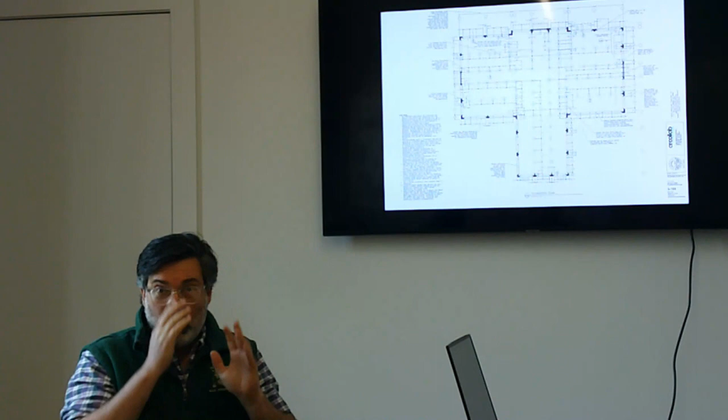And since that time, we've done something completely different from what we said in that meeting. That's because in thinking about the scope of what we were proposing, after talking to the National Trust folks and some folks at the state level in historic preservation, we decided that in order not to jeopardize future eligibility of the building for National Trust grants or National Park Service grants, we needed to take a slightly different approach that was more conducive to not discouraging that kind of grant funding.

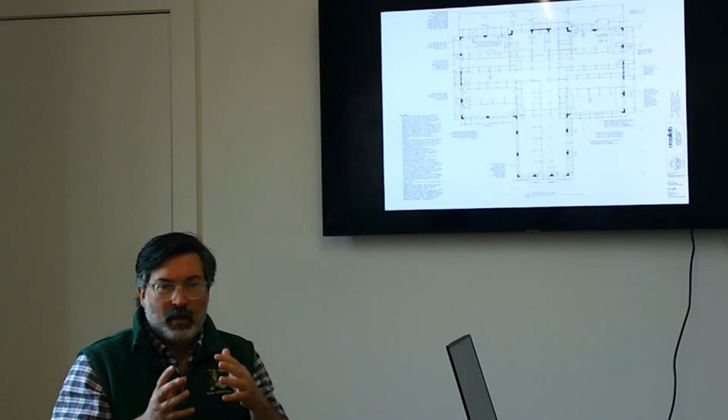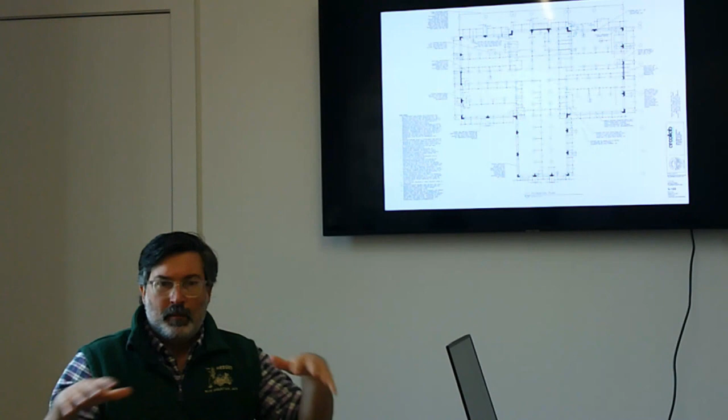So what it meant was that we derived a structural system which inserts steel structural frames inside of the building, along with a lot of fundamental foundation reinforcement and supplementation, and then additional work in the attic as well. We wanted to meet today to talk about what that scope is, to make you all familiar with it, so that when the time comes to apply for future grants and to get pricing for this work, we'll all be on the same page with what's being proposed.

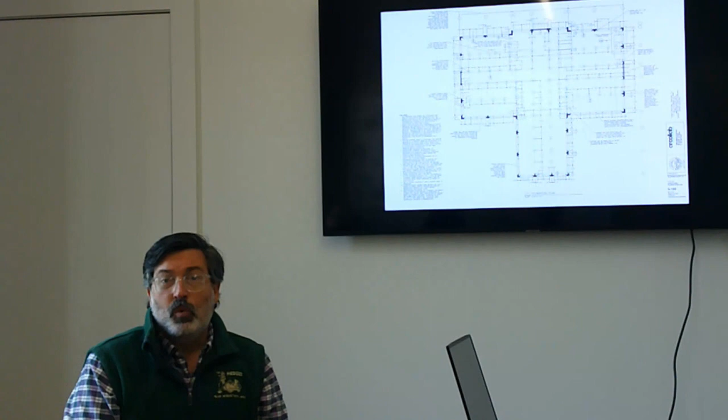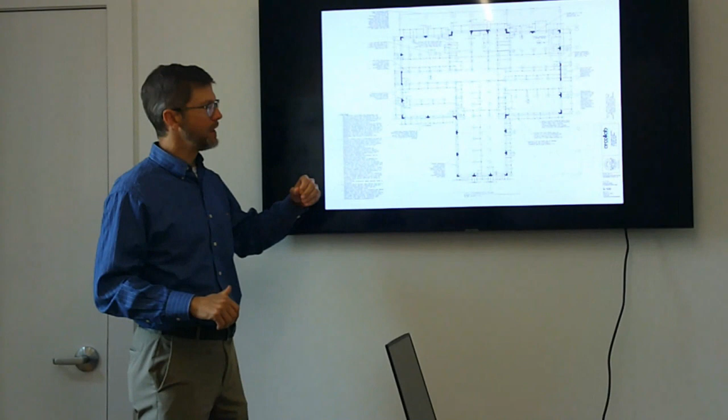So I'll turn it over to Reed to describe what we're proposing and what's in those drawings. I'll just pop up to the screen, that may be the easiest way to do it. It may take about 15 minutes or so to run through the primary work we'll be doing. This is the foundation plan, so we'll start at the bottom and work our way up.

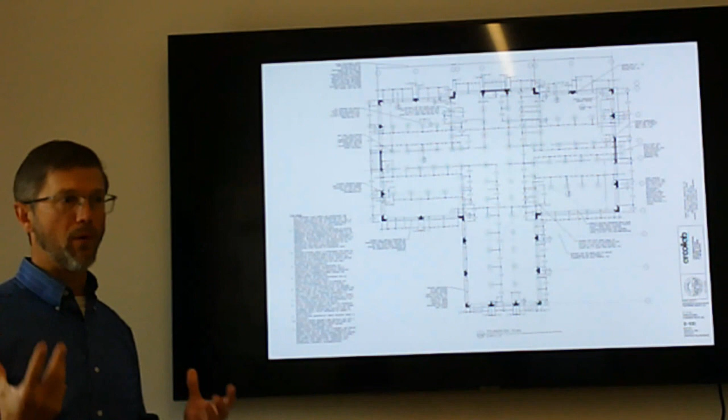The existing brick piers are in poor condition. What we're doing to remedy that: at the perimeter of the building, we've got to leave those brick piers in place for historic purposes, so they'll be repaired, but we'll be supplementing them with new concrete footings and a series of relatively small steel posts.

They're knee posts essentially, below the framing down to the new footing. Each of these, it kind of looks like a black dot at this scale, but each is a new steel post. So at the perimeter, they'll help supplement the brick piers.

On the interior, we're fully replacing those brick piers with new steel posts and footings. The other purpose of these posts is to reduce the span of some of the floor framing, to improve its performance, and also to give us 100 pound per square foot live load capacity, which we'll need for the potential assembly uses in this part of the building.

Let me add to that - you may remember last time, when the building was built as a school, it was built in a customary way. Now, with the potential change of the building to be both a museum space and an assembly space where you have gatherings, the building code requires those floors be able to support additional loading, more than it was built to handle. And so there are different parts of the building doing different things, so the loading requirements are different in different parts of the building.

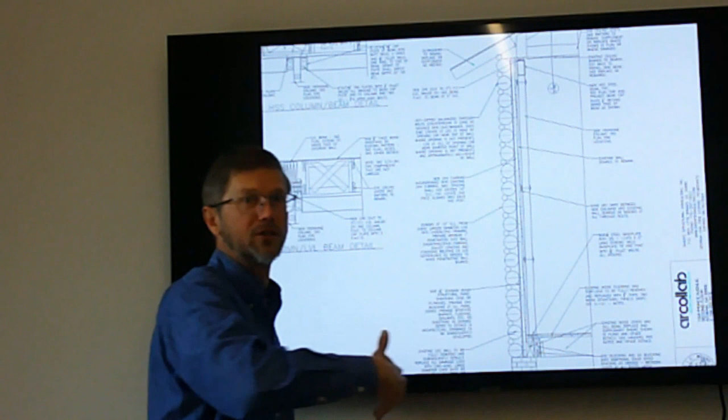When you look where there's a big log and then there's a little sapling that was used to chink the gap, those are missing in a lot of places. If you look through, you can see right into the back of the wood plank finish on the inside of the walls. The big problem in the whole scheme of how you repair and reconstruct these log walls is why recreate the same faulty condition that was there before, where water could literally penetrate directly to the interior and cause all sorts of problems.

So this is the big improvement to this system: when the logs come down, it gives us a rare opportunity to actually access the back of that original interior wall finish. By sheathing that and putting a waterproofing layer on it, you effectively create a watertight envelope. The logs then go back in, new and existing, toothed together, and it doesn't matter whether that outside layer leaks like a sieve anymore or not. It just doesn't matter, because the waterproof barrier behind it will shed the water down and out of the wall.

It also makes a much tighter envelope so that in future use, if you air condition the space or have mechanical systems, you're not conditioning the outside air as well. Right now you have what's equivalent to a wood tent with so many holes in it. This will create a much tighter envelope that will allow you to actually get some legitimate cooling and heating in that space for future use.

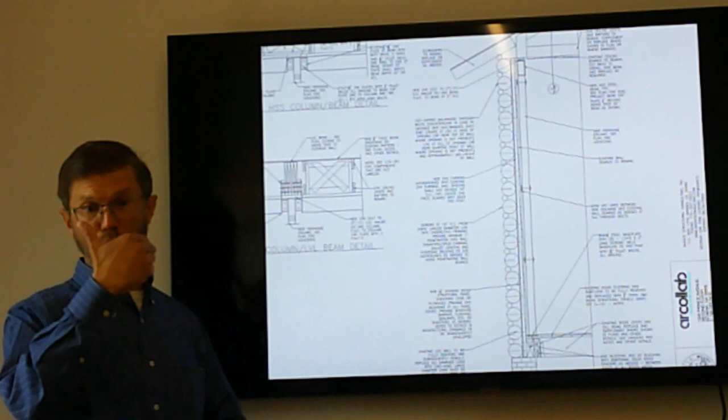But the other advantage of this system long term is that right now these logs are the load-bearing perimeter wall. We're adding a steel frame that Joe alluded to earlier, based on our conversations with historic preservation folks at the state, that will now serve as the load-bearing plane for roof loads. This will also serve to resist wind loads on the walls. Right now, there's not a lot of wind load resistance.

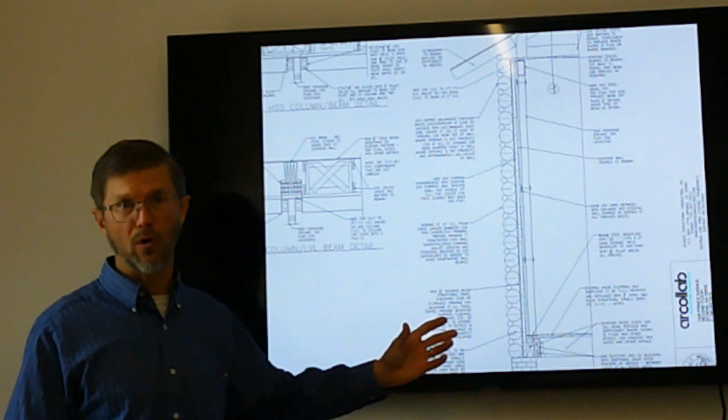We're mitigating that with these steel frames as well. The advantage long-term is, if you have deterioration of an individual log, right now in your system you could not take that log out without essentially rebuilding the entirety of the section of wall it's in. With this new system being more of a veneer, you'd be able to pull out an individual log and replace it if in 30 years you have deterioration, or if some of these reused logs are borderline and continue to deteriorate and need to be replaced in 15 years, for example. So long-term this will be a very good system, just a matter of getting there.

We're hoping that some of the logs, if you look at the outside face that's been exposed to the weather, there's deep checking in them, even cracks that have opened up from shrinkage of the wood fibers. We're hoping the backside of those same logs is in relatively good shape because it hasn't had the solar exposure and has been relatively protected from moisture. So we're hoping to get up to as much as 50% of the logs being reused—we can basically take them out of the wall, flip them over, and put them back.

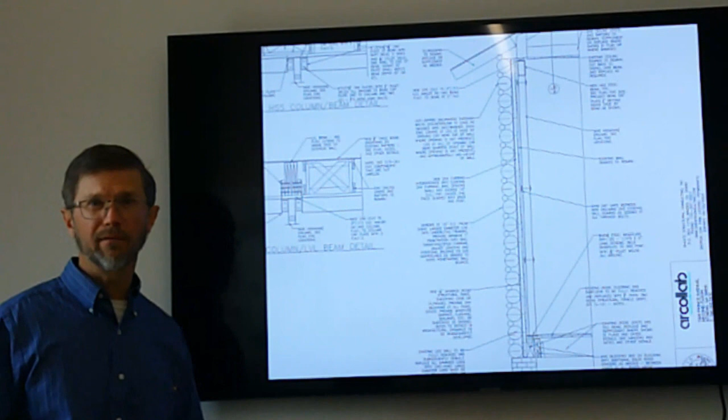Because they're not the structural unit anymore, not the thing that has to hold the roof up, the integrity of those logs is less critical. It basically has to hold up itself and the logs above it, and that's it—it doesn't have to hold the roof anymore. And we're anchoring it back with some screws for wind purposes, which will help temporarily with some of that process, or some of that self-weight support too.

I guess we can go back to—I was just going to finish running through this list. So that was where I got sidetracked: fully remove exterior walls in the area of the work.

Fully remove the subfloor and flooring for crawl space access in the area of the work, to be able to get to the members there to rehabilitate them. Remove all interior piers and all damaged first floor to be replaced with new members in the area of the work. Install new footings, new steel piers, install new first floor framing members.

Then we put the subfloor back, or put new subfloor in—in many cases that would just be 3/4 inch tongue and groove plywood or OSB, much like you'd have on a new house today. Install new steel framing and roof ceiling support beams, and then the last step, which we'll get into on the next slide, is the supplementation of the rafters and ceiling joists.

So that brings us to this plan, which is the ceiling framing plan. From the attic, there has been substantial movement, warping, rotation, gaps where we shouldn't see gaps in many of the ceiling joist laps, and also in the rafters themselves. There's a large gap at the ridge that has leaked and led to a lot of that deterioration in the center corridor now.

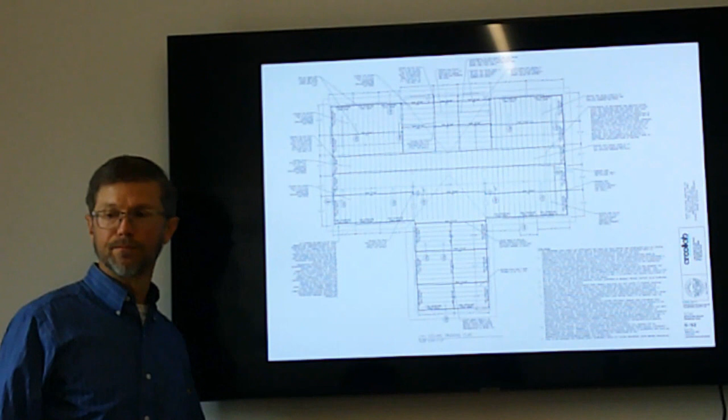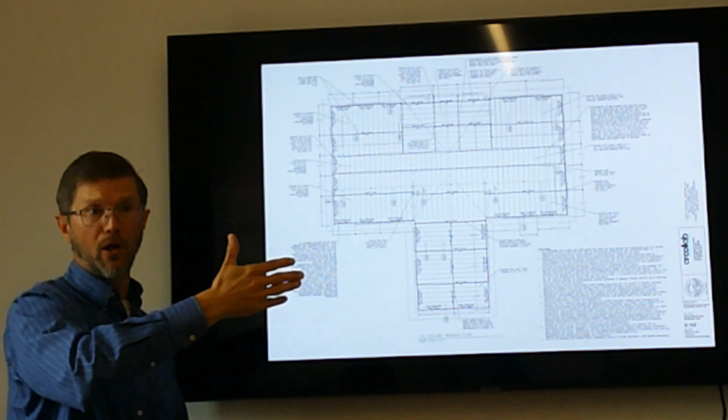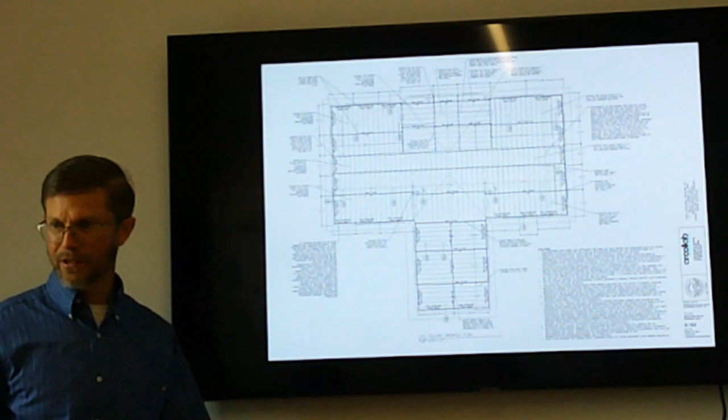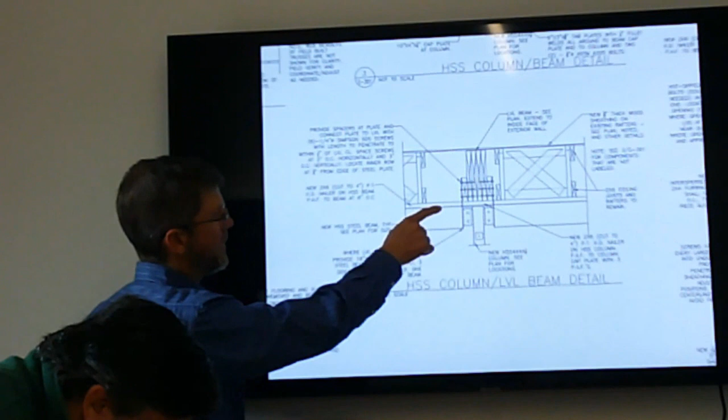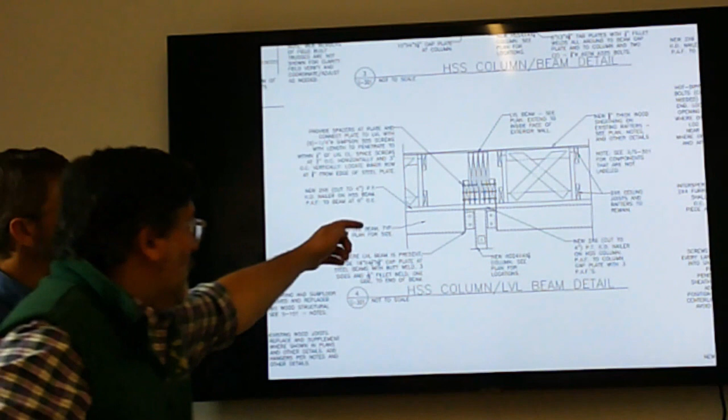And then the other corner? Yes, then we have one more in this corner. But any interior posts for the LVLs are hidden within the wall framing—except where I double-use those posts at the exterior walls, for two purposes, also supporting the LVL load. You could go to that detail 4, Joe, on 301. So this is the steel tube that is below the ceiling, and then there's the LVL beam above the ceiling, and this is our steel column that's inside the room. So you would see from this line down exposed, but everything above that would be in the attic.

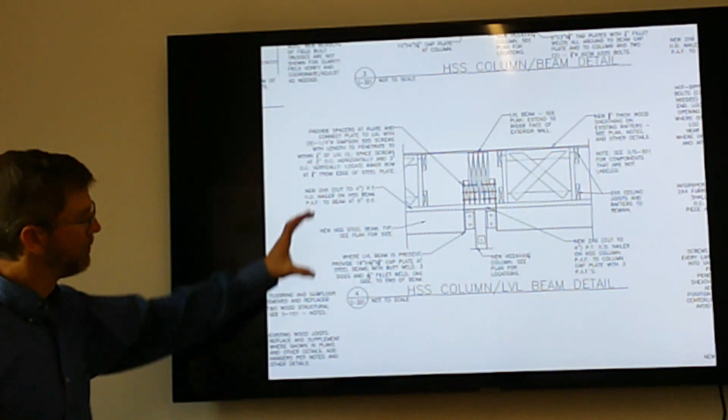And that's a good spot to talk about size too. Those columns are going to be 4 inches by 4 inches—not crazy extensive. And then those steel beams are 6 to 8 inches: 6 at the walls with less load, and 8 at the more heavily loaded walls. So they're relatively compact, tubular, square steel. The ceiling in those spaces is about 12 feet, so you're up a couple feet above what this ceiling would be. It should be as low impact as it can be visually.

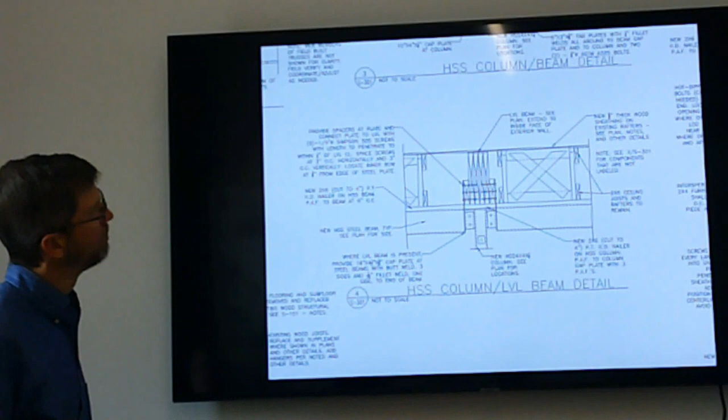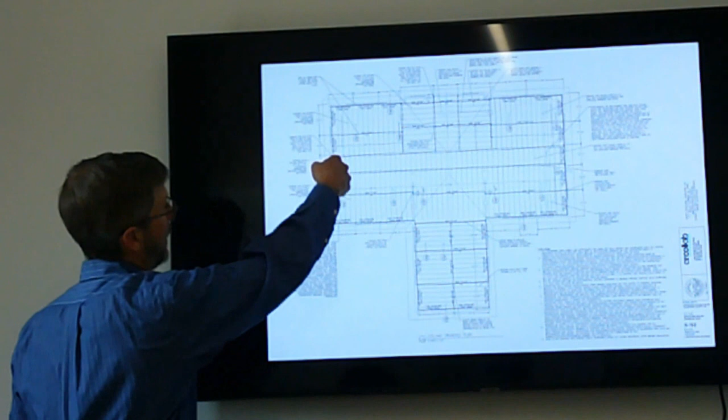If we go back to the plan, in all of the classrooms that have coat rooms, half of those steel posts will be located in the coat room. There is no additional steel framing in the center of the classroom—so in 3 of the 4 classrooms, the north and south wall steel framing will be in the coat room exclusively. Ultimately, in that one classroom that doesn't have the cloakroom, you may choose to reconstruct that wall to restore it to its original configuration—I'm not sure why it was taken out in the first place—and that would match the classroom size with everything else in the building.

All right, I think we're ready to go.

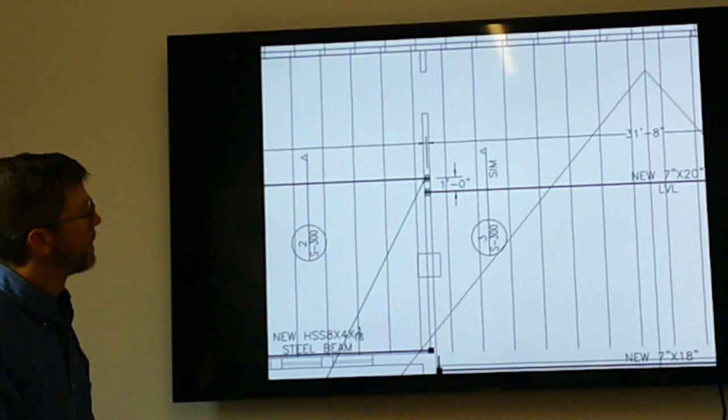So these posts, like these two in the middle, those are hidden in walls. And that's just studs, 2x4 studs, packed together.

All right, next one. So this is up to our roof. I've shown some of those same beams in this plan, though I haven't relabeled them, just so there's no duplication in the contractor's pricing. I want to make sure he knows that's just happened once at the ceiling.

The rafters, where let's see, I've used a, documented where I think these are going to need to be supplemented, and that's in these that have the SR label on them. So this is the area where the rafters seem to be the most deflected, the most warping, the most gaps, seem to be prevalent in these areas.

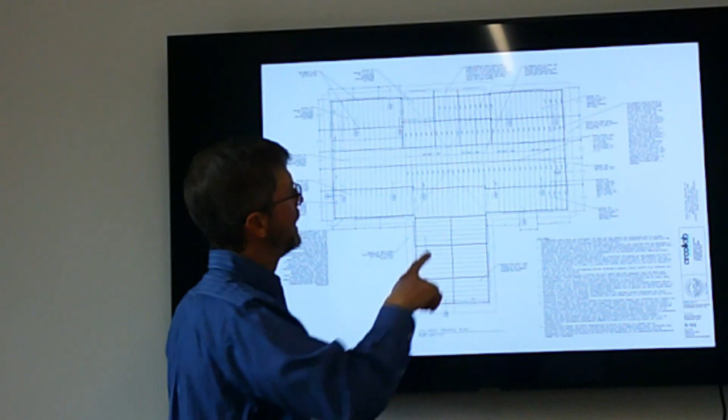And you can see some of these areas are adjacent to the wall that has collapsed. And then other areas adjacent to the ridge, these rafters go up beyond the corridor walls to the ridge. So I'm expecting that all of those will need to be supplemented with a new 2x6 to achieve what we want to achieve from a roof loading standpoint.

The split at the rafter is also a factor of the wall on one side collapsing down, correct? Or is it that it's... I think it's more of the deflection of the ceiling joist that they're braced to.

So as a supplementation, will the existing rafters somehow be lifted and pushed back together again, or will the supplementation cover the gap? The supplementation will cover the gap. And then the replaced roofing would then seal that up. Correct. And that's a great point, Joe.

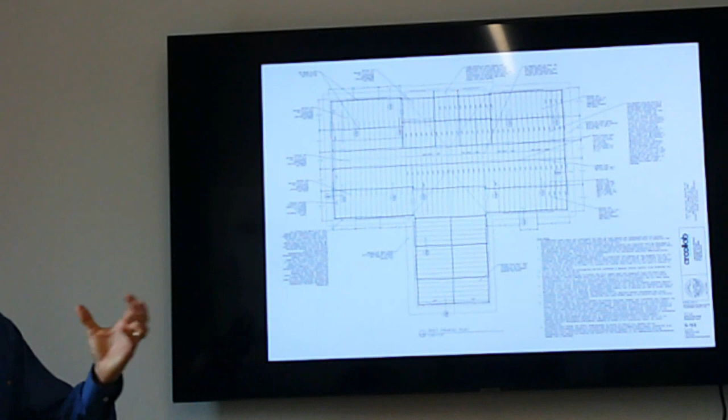The other part of this roof repair, really the big part of it, in addition to supplementing the rafters, is we're pulling off the metal that's there now, the 1x purlins that are there now, and replacing that with OSB, oriented strand board, wood panels, and then putting back the roofing on top of that. So that gives us a much more stable roof system, and also gives us a roof diaphragm, which helps us resist wind and seismic forces. Not so much seismic for your area, but wind for sure.

One of the choices we'll all have to make is what happens with the roof. What is the roof going to be? It's possible to potentially reuse the existing 5V crimp roof, the rusted roof that's there, but not as the actual waterproof piece of the roof assembly. By sheathing that roof and having a continuous surface, you could put a membrane in on that roof that would then be hidden underneath the metal. That membrane would actually be the waterproofing layer, and the metal would go back on, basically for aesthetics. Once you take off a metal roof, it's awfully hard to put it back on and make it watertight, because you've got all these holes you're going to have to match.

So that's one way to do it, if that rusted roof look is exactly what we want to go back with. There are new products that are also rusted metal, a special kind of steel that can go back, that will rust very quickly and then stop rusting, and it seals itself up. That's an option for roofing as well, a new kind of roofing. Or just a new metal roof of some kind, a new 5V crimp roof could go back on, but it's going to be either silver, a galvanized color, or a color like dark red or dark green or something like that.

I don't know, historically, I assume that the original roof, if you saw it in 1935, was a galvanized roof, it would have been silver. And then just weathering over the years has made it rust.

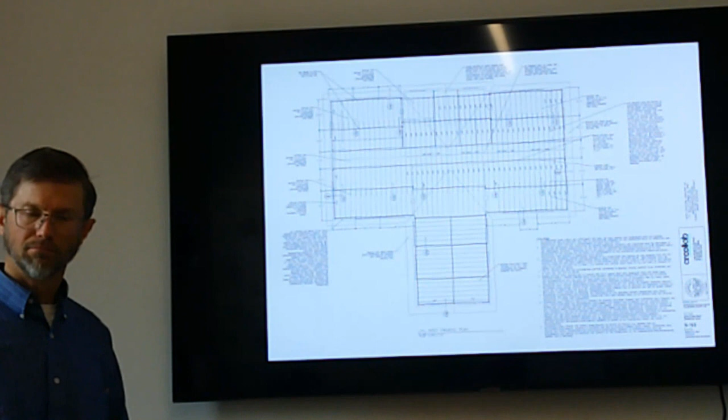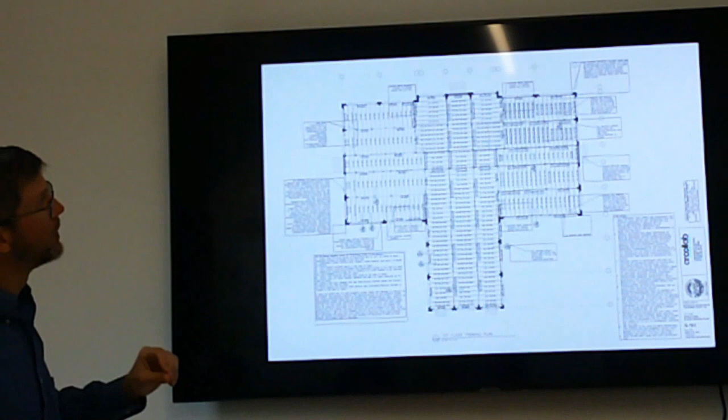But anyway, I think that's about it. We may go back to - I think it was on the foundation plan - where I briefly showed the phasing. There we go. So phasing-wise, we're seeing this portion of the building where we have the collapsed wall as phase 1, and the remainder being phase 2, with the ability for you to break that into sub-phases if necessary. But we felt this was the first piece that should be dealt with because of that collapse.

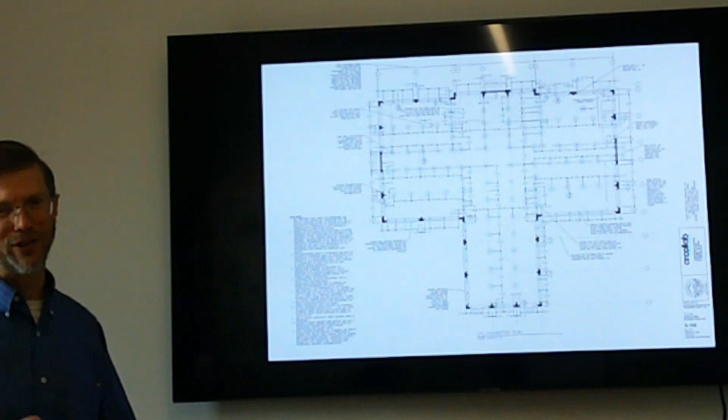When you're talking about this area as phase 1, that's all of the work from foundation to roof. It's very difficult to do this in any other phasing breakdown because we have exterior walls that have to be rebuilt, brick piers that aren't in good condition, and floor framing that's not in good condition. We have to remove the subfloor to get to the floor framing. So until you have a stable roof structure, water's just going to continue to come in. It was very challenging to phase it any other way - I didn't see another way other than taking a chunk of the building, getting it done right, and then moving on.

And I'm sure you've written out the process for that in your drawings, but we also have that in the report - the process for the phasing and how that needs to happen to maintain a watertight building when you have half that's been rehabilitated and half that hasn't.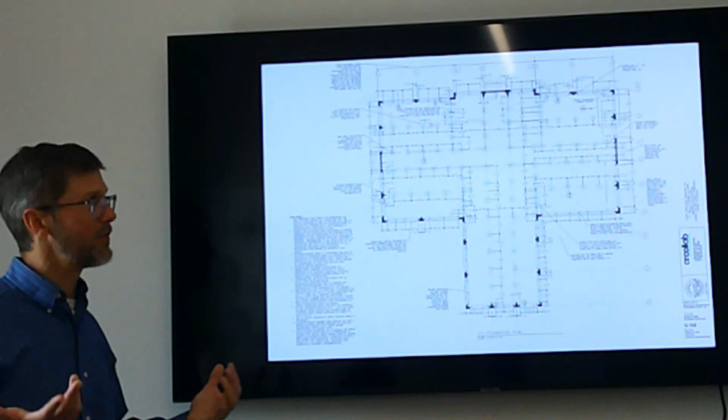And I guess the last thing I'll say is, just in summary, this is a big project. So don't let me minimize what's got to be done. I don't think I have, but just to make sure everybody recognizes that going forward - it'll be a very interesting and exciting project to be involved in, from a personal and professional standpoint. But it is a big project.

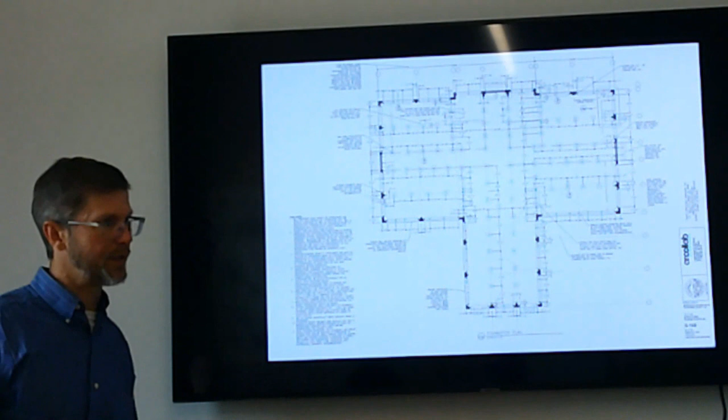And that's really all I wanted to bring to your attention from some review of the drawing. Thank you.

So if phase one is that north wall, how far back are we talking about from foundation to top? It would be all the way back to the inside corner. There's no real way to cut off the work until you get to an inside corner, so this logically becomes the whole part of it.

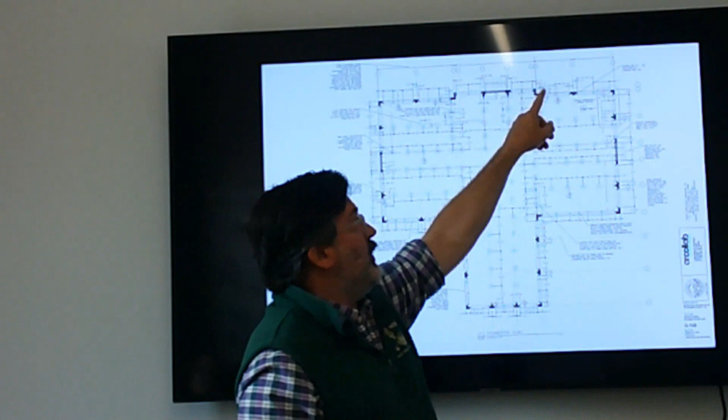The south wing is in the best condition of any part of the building, so really the middle is where you're phasing as you go across the building. I know there are some problems at this corner that might be thrown into phase one just to stabilize it, because it's really collapsing now. But moving this way through, the roof's still closed over this area and the floor's in good shape, so this is the part that has the lightest touch.

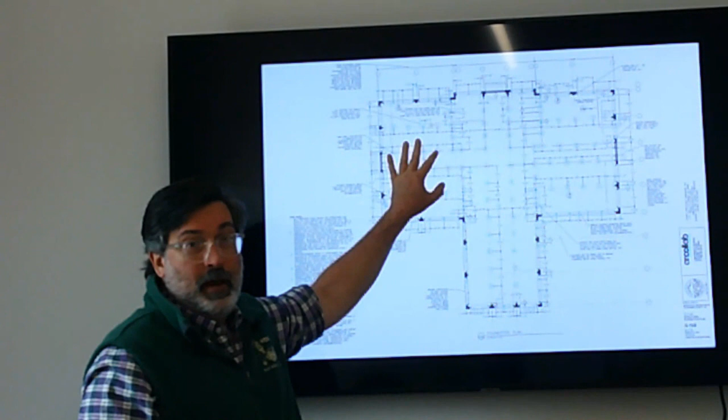Also remember, this is the 40 pounds per square foot area, so it doesn't require as much supplementation of structure as the rest of the building. So point out what will be phase one, then phase two and phase three, and are we doing this in 4 different phases?

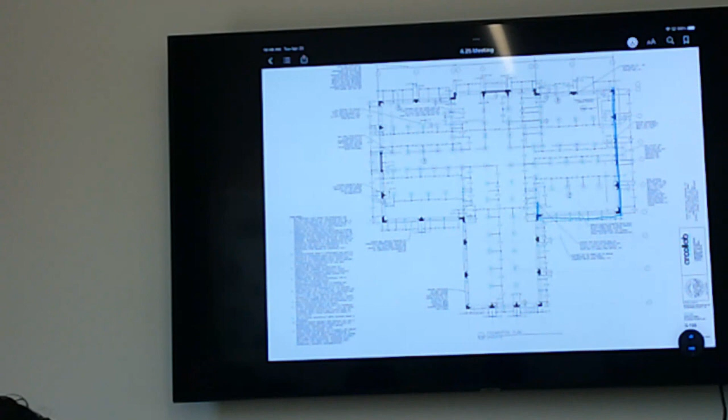It could be, and here I can use technology to show it. So it'd be like phase one, and then phase 2A, phase 2B, if you decide to split up the rest of the building. Otherwise it would just be north and everything else.

So phase one in blue, using my virtual magic marker. Then phase two, it could be one of two things. Overall, phase two should be this, but it could be split here.

Or actually, maybe it would be better if it's split at the hallway. So this is the corridor, and right now this is the auditorium space. The corridor is just forward of it, so you could potentially split it that way.

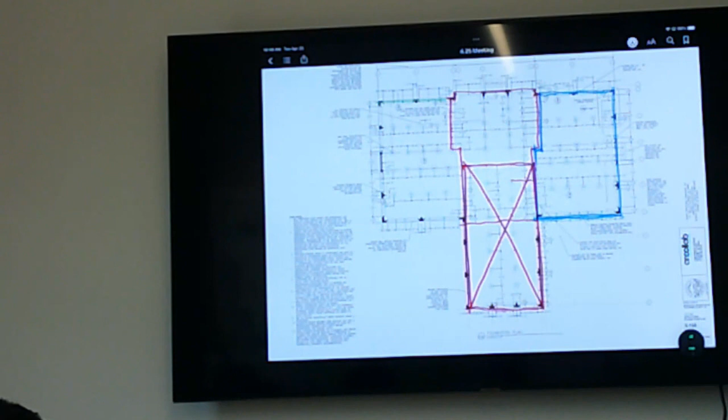And then phase 3/4 - no, it'd be phase 2B, 2A, 2B. Because phase 3 is mechanical. All of it, yeah. So phase 1 and phase 2 are about the structure, but then in phase 3 we get into mechanical, and phase 4 is interior rehabilitation.

So you're saying that as part of the green phase? That would be 2C. If the red with an X is phase 2A, the red with no X is phase 2B, the green is phase 2C.

It just depends on what the situation is. And you said phase 3 would be mechanical, what was the other one? Phase 4 is interior rehabilitation, so all of the finishes, paint, trim.

That's where the extra bathroom will come into? Electrical at the same time? So I would imagine the fixtures could go in 3 or 4, because they kind of overlap, like the lighting and the toilets, the sinks.

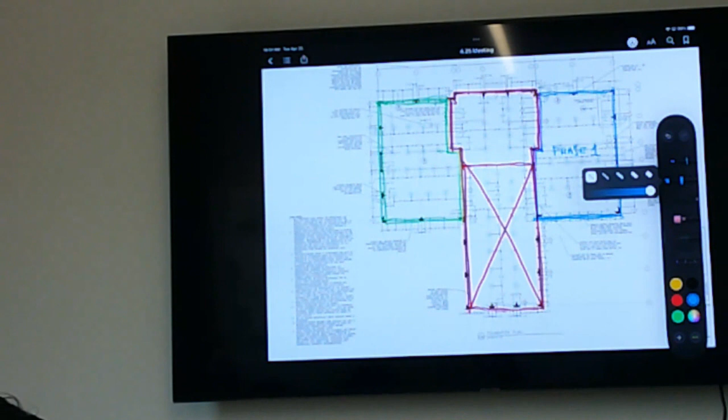That could be a coordination. You could put the fixtures in phase 3, or you could just put the plumbing in and wait for phase 4 to put all the fixtures in. Choices. Again, it depends on what the grant is like for phase 3, where the funding is.

What's this one, 2A? Or did you want to do the auditorium first? It would probably be better to do that section first, because that's where that corner has collapsed. Is this right, 2B? And then I'm gonna erase this again, so that's okay.

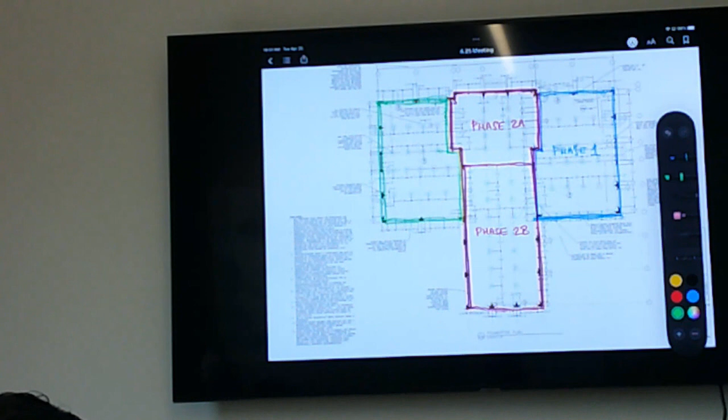And then green phase 2C? Something like that.

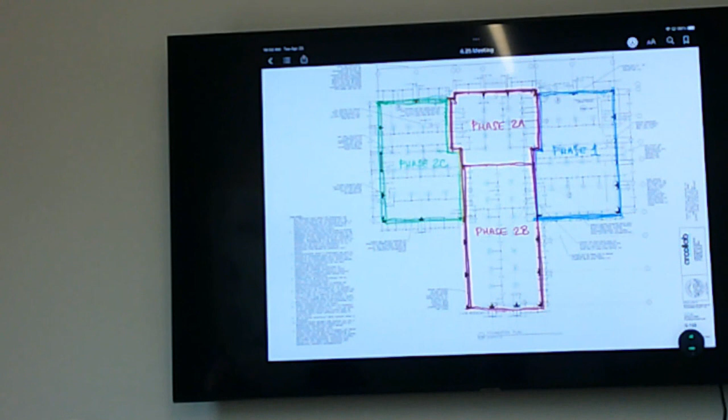What do we - I'm thinking aloud here - as far as the electrical, in order to do the mechanical stuff, you're gonna need to do electrical at the same time. And is that all part of the interior rehab? It's in phase 3, so we've broken out all of the MEP systems - mechanical, electrical, and plumbing - into phase 3.

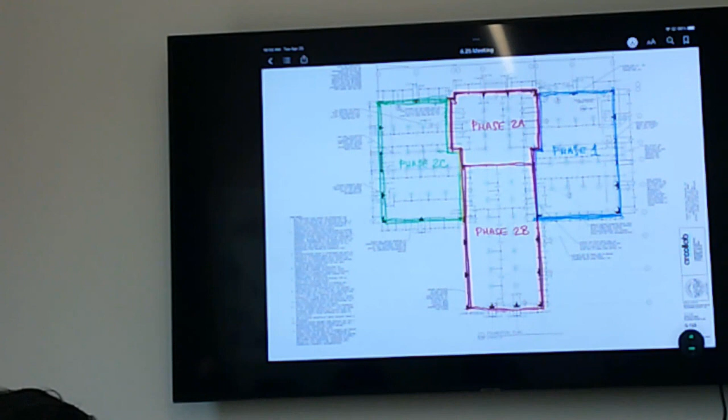And then any of the finishes, interior rehabilitation of the floor, the wall finishes, painting, potentially fixtures, anything to take it from where it is at the end of phase 3 to a fully functioning, code compliant, usable space that you can occupy. Say that again, I like that - fully usable, code compliant, multifunctional space, something that you can occupy and that the county will give you a certificate of occupancy for.

Kinda don't care, we don't really need that. But they don't - well, that's easy. You can do whatever you want. Just about.

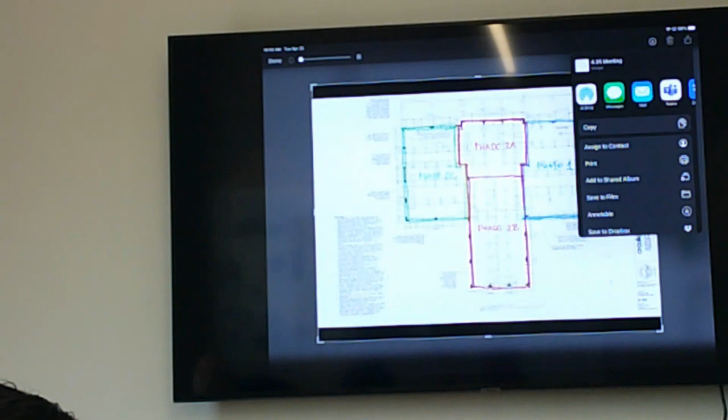So there's going to be an upgrade in the electrical part of it, I'm pretty sure. What phase would that be for? That would be phase 3. Anything mechanical, electrical, or plumbing is in phase 3.

But the work to go into the walls to install electrical - are we proposing that the walls will be left open after that work goes in? Then phase 4 will be when it all gets covered up properly, with sheet rock or wood planking, whatever goes in. We probably need wood plank to go back in. I think that makes sense.

So after all that work goes in, it's going to look like it's been butchered again a little bit, because all these systems have to go into the structure, into the walls and stuff. Sadly, it'll sit that way until that 4th phase comes along and everything gets covered up and repainted and fixed. Or if the money's there, you just do them both at the same time, phase 3 and 4 at the same time, which would be ideal.

That's very true. There's no one saying you couldn't do any of these phases together if the money was there. You could do phase 1 and phase 2 at the same time if the money is there. You could do phase 1 through 4 at the same time if the money is there.

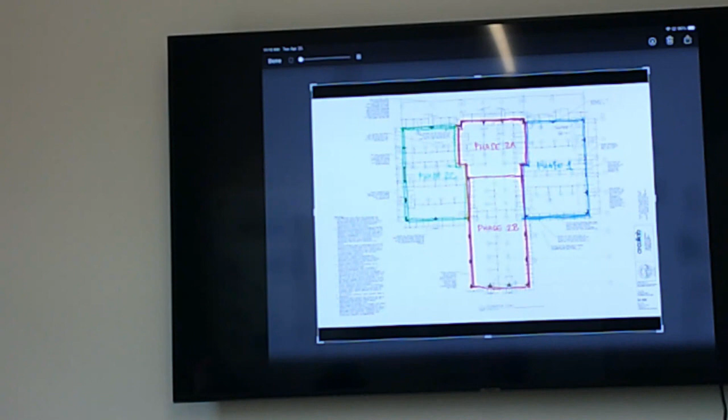So now it's a game of wait to see if he actually tries to contact me, because all he did at this point is put a like on the post. And you know it's him because they give the official blue symbol, you know it's an official person. So now we wait to see if O'Shea really reaches out to us. At this point, he should be researching if he's interested, trying to see if he really wants to get involved with this. So we just have to wait and see. But he has a degree in architecture. Good trouble, you're good trouble. That's exactly what that is.

Terry, just holler when you need anything that we can provide, just holler. If you're doing grant applications and you need information, just holler.

As far as talking to the contractors about getting numbers, it's better to have data which is more current when you're applying for the grant money. And since the construction economy is so volatile right now, it's not about waiting until the last minute, but also just having more accurate numbers. The closer you can keep it to the due date of the grants, the more accurate the numbers can be. Right, so, and you know the grant cycle is far better.